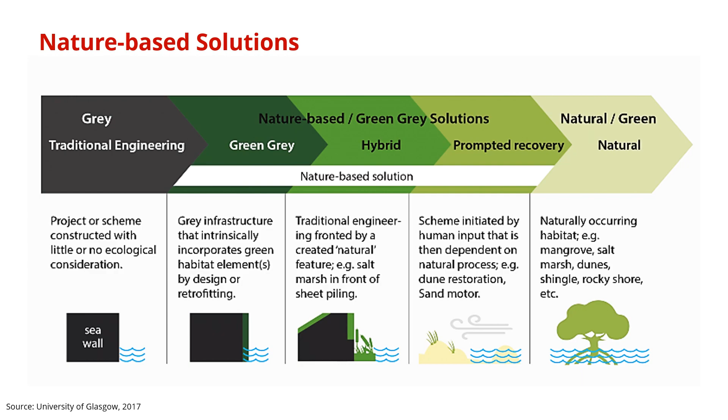NbS emphasizes integrating natural elements into urban design for environmental benefits, such as stormwater management and enhancement of urban biodiversity. These approaches are increasingly seen as cost-effective and sustainable options, offering co-benefits like improving human health, enhancing biodiversity, and supporting sustainable livelihoods. They are crucial for achieving global targets in biodiversity conservation, climate change mitigation and adaptation, and sustainable development.

As one of the important approaches of NbS, let's look at the green infrastructure in more detail. The concept of green infrastructure refers to a range of measures that include plant or soil systems, permeable surfaces, stormwater harvest, and landscaping. These are designed to store, infiltrate, or evapotranspirate stormwater, reducing flows to sewer systems or surface waters.

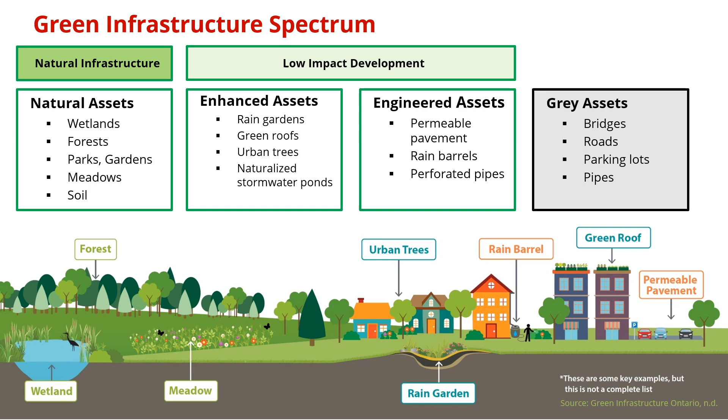Green infrastructure differs from traditional gray infrastructure by focusing on natural processes for stormwater management, offering environmental, social, and economic benefits. The spectrum of GI can range from natural ecosystems like forests and wetlands to engineered solutions like porous pavements, with features like bioswales and green roofs in between. This eco-techno spectrum helps to conceptualize the variety of GI features in urban settings and is crucial for evaluating their effectiveness in providing infrastructural services.

Within the green infrastructure spectrum, there are different approaches. NbS is an umbrella concept of ecosystem-based approaches to address societal challenges. These approaches include: 1. Low-impact development relevant for urban planning. 2. Restorative approaches in integrated coastal zone management. 3. Sustainable land management approaches. 4. Integrated water resource management. 5. Integrated fire management. This session will focus on low-impact development, integrated coastal zone management, and sustainable land management.

Most importantly, when we implement NbS, we have to keep in mind the 8 principles as advocated by IUCN. First, NbS embraces nature conservation norms and principles. However, they note that while NbS embraces nature conservation, not all conservation actions necessarily qualify as an NbS.

NbS can be implemented alone or in an integrated manner with other solutions to societal challenges, for example, technological and engineering solutions. NbS is determined by site-specific natural and cultural contexts that include traditional, local, and scientific knowledge.

NbS produces societal benefits in a fair and equitable way in a manner that promotes transparency and broad participation. NbS maintain biological and cultural diversity and the ability of ecosystems to evolve over time.

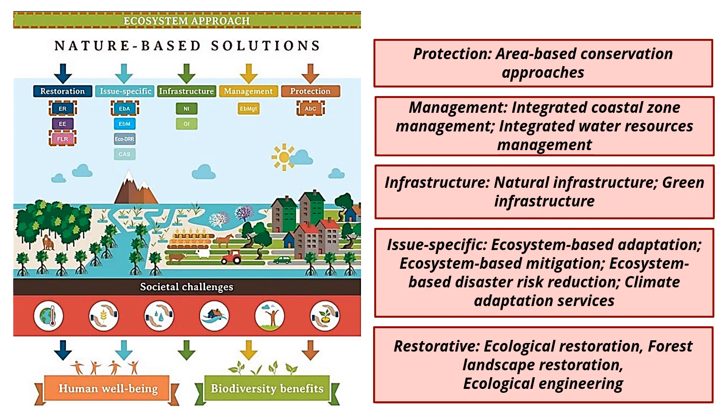It is important to remember the following. NbS enhances our array of ecological strategies. Even deserts, as ecosystems, play a role in this diversity. Economic activities need not cease entirely but rather progressively shift towards sustainability.

As innovation drives new solutions, many will emerge from a hybrid zone combining nature and technology. At the moment, low-impact development represents readily achievable options. These solutions are tailored to specific hazards and locales, contributing to a sustainable transition. NbS are dynamic, constantly evolving to be specific to particular hazards and locales within the broad and active realm of sustainable practices.

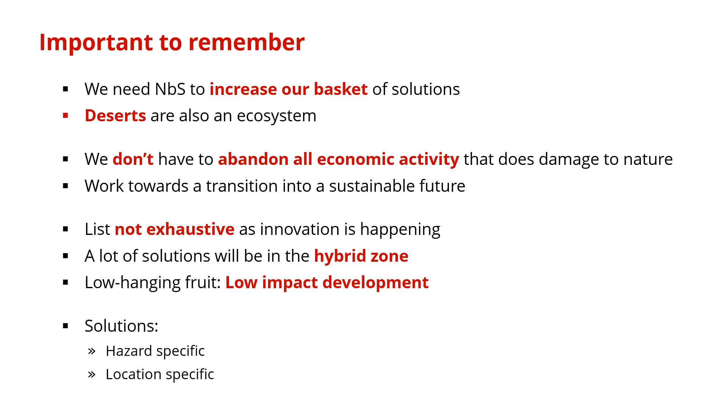In the urban context, green infrastructure is a strategic approach to developing interconnected and multifunctional networks of blue and green spaces that provide a wide range of environmental, social, and economic benefits and simultaneously enhance the climate resilience of cities.

Urban green infrastructure includes different types of blue-green spaces such as forests, wetlands, agricultural land, public parks, private gardens, single green elements like street trees and green roofs, or ponds and streams. These play a crucial role in enhancing climate adaptation and mitigation capacities and reducing negative impacts of climate change hazards such as heat waves, flooding, and drought in cities.

In a city setting, NbS specifically refers to different typologies of green infrastructure that use nature's own local resources - vegetation, water, and soil - in a smart and efficient way to tackle different environmental, societal, and climate challenges instead of implementing conventional gray infrastructure or technological-based solutions.

The spatial scale of NbS in cities can vary from large forested areas to small-scale stormwater systems. In addition, the role of human control or technological solutions in NbS can also vary greatly, from self-regulated natural ecosystems, such as flood control provided by urban wetlands requiring no or limited human intervention, to hybrid gray-green solutions, such as systems for the management of stormwater and urban runoff, for which technology and human intervention play a significant role.

Now, let's look at some commonly used examples of green infrastructure in a city.

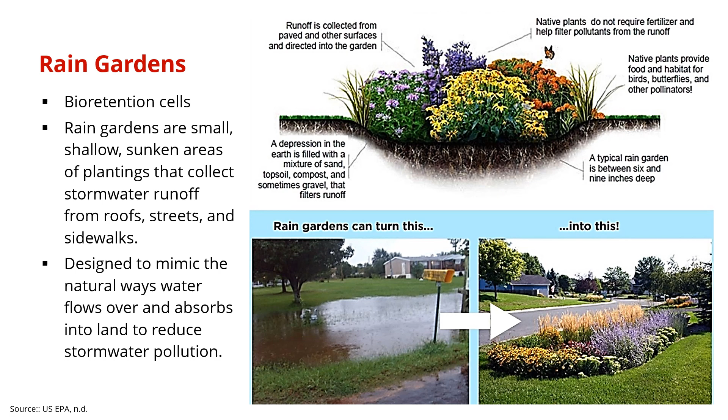They help keep polluted water out of our sewers that would need to be treated at a wastewater plant or would overflow into a water body. Stormwater becomes polluted when it flows over pavement and comes into contact with automotive fluids, sediment, trash, and pet waste. Pollutants can be absorbed by the deep plant roots instead of contaminating our rivers, lakes, and streams.

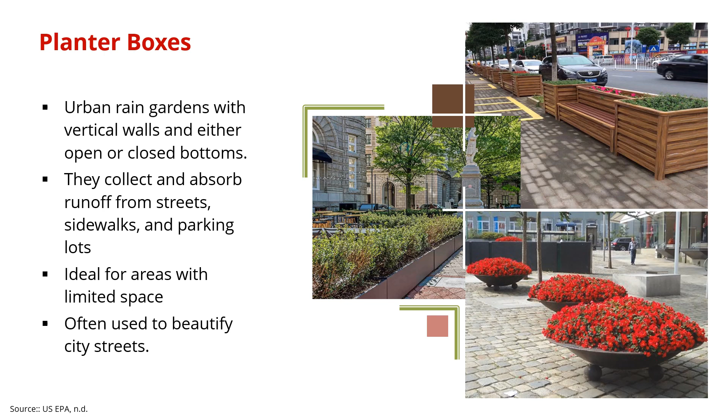The next example is planter boxes. Planter boxes are urban rain gardens with vertical walls and either open or closed bottoms. Usually found in downtown areas, they collect and absorb runoff from streets, sidewalks, and parking lots. Ideal for areas with limited space, planter boxes can be a useful way to beautify city streets.

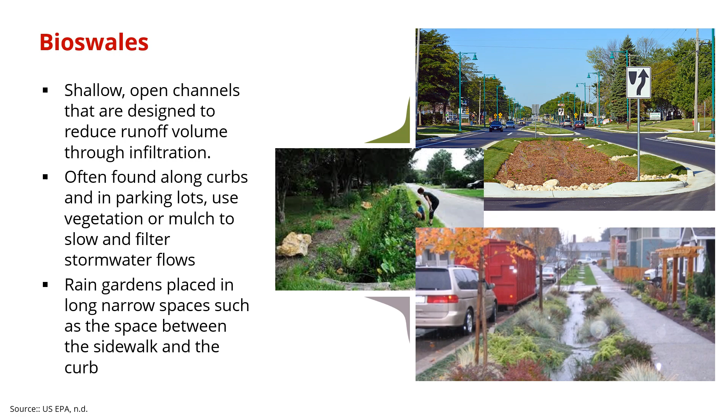Another good example is bioswales. Bioswales, often found along curbs and in parking lots, use vegetation or mulch to slow and filter stormwater flows. Bioswale essentially allows water to be taken to a filtration site after a rainfall event.

The problem with the traditional gutter system is that water doesn't get any treatment before it goes to the river, stream, water body, or the ground. Aside from living organisms, there are impurities like oil, grease, tar, carbon, heavy metals, and gasoline. An open swale is better than a concrete pipe but is not very effective in filtration.

So, a bioswale is needed. A typical bioswale would have an engineered soil mixture that filters water before it goes to the ground. Along with the soil mixture, native plants and shrubs, which are equally important for filtration, are used. A vegetated bioswale is a narrow version of a rain garden. The main difference is that the bioswale moves water somewhere else in the garden, allowing some of it to infiltrate, while a rain garden is specifically meant to increase infiltration.

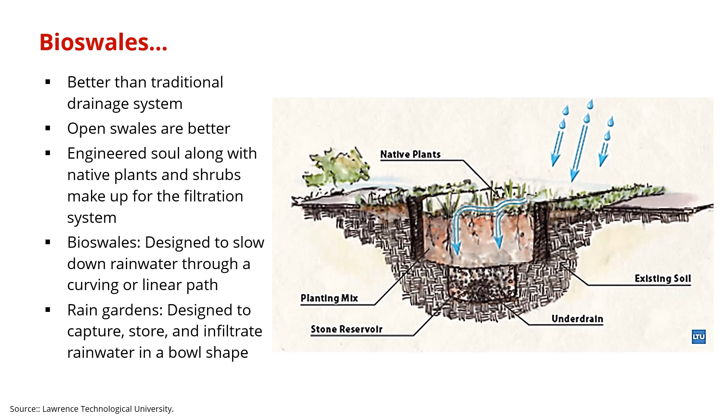We also have seen urban canopy being used by numerous cities. Trees absorb stormwater in their leaves and branches. Many cities have set tree canopy goals to restore the benefits of trees lost when the areas were developed. Homeowners, businesses, and community groups can participate in planting and maintaining trees throughout the urban environment.

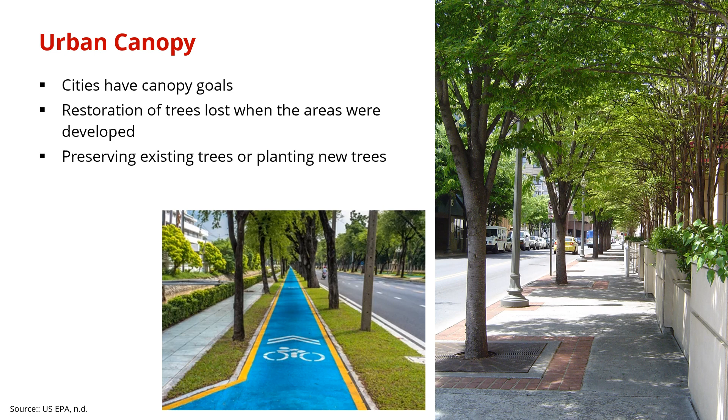The use of strategic green spaces can not only absorb stormwater runoff but also reduce the urban heat island effect. Green streets and alleys are created by integrating green infrastructure elements into their design to store and filter stormwater. Permeable pavement, bioswales, planter boxes, and trees are among the elements that can be woven into street or alley design. In addition, green spaces can lower drought impacts and remove carbon.

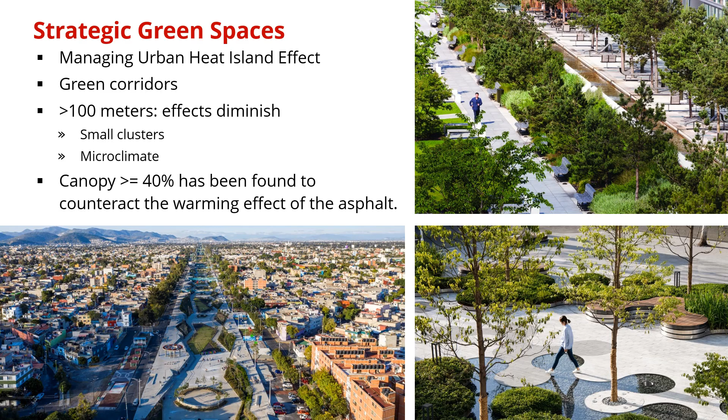The use of permeable pavements is another common example by cities. Permeable pavements infiltrate, treat, and store rainwater where it falls. They can be made of pervious concrete, porous asphalt, or permeable interlocking pavers. This practice could be particularly cost-effective where land values are high, and flooding or icing is problematic.

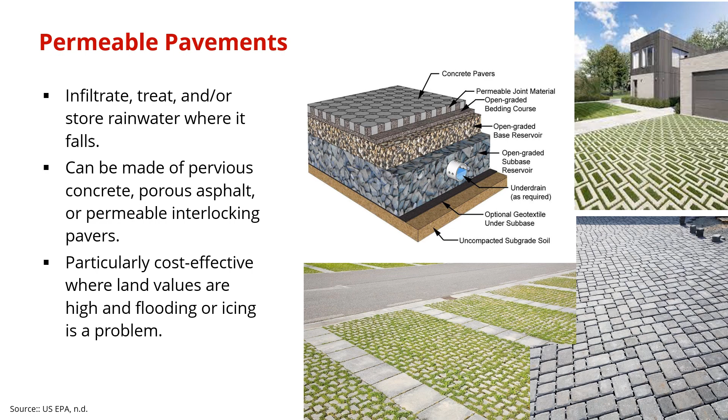Another example is the use of green roofs. Green roofs are covered with growing media and vegetation that enable rainfall infiltration and evapotranspiration of stored water. They are particularly cost-effective in dense urban areas where land values are high and in large industrial or office buildings where stormwater management costs are likely high.

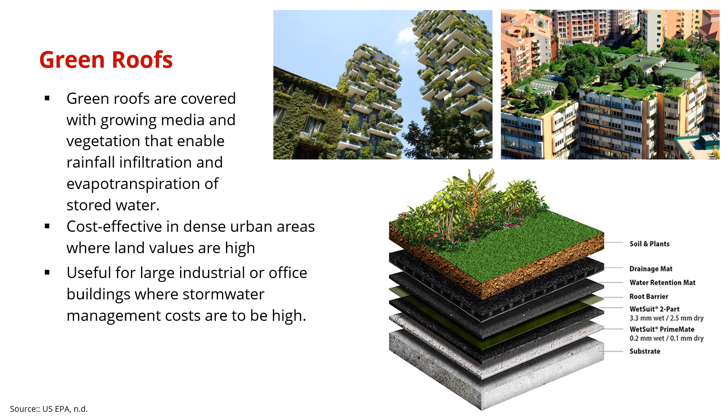Another good practice is low-impact development, a land planning and engineering design approach aimed at managing stormwater runoff as close to its source as possible. It prioritizes the preservation and use of natural features to protect water quality and associated aquatic habitat. There are many examples of low-impact development.

Capture and reuse of rainwater, downspout disconnection so that the rain is drained into rain barrels or permeable areas instead of storm sewers. Soil restoration is a technique used to enhance and restore soils by physical treatment and/or mixture with additives, such as compost, in areas where soil has been compacted. Soil media restoration increases the soil's water retention capacity, reduces erosion, improves soil structure, immobilizes and degrades pollutants, supplies nutrients to plants, and provides organic matter.

A vegetated filter strip is a permanent, maintained strip of vegetation designed to slow runoff velocities and filter out sediment and other pollutants from urban stormwater. These are just some examples of low-impact development combining engineered and gray assets.

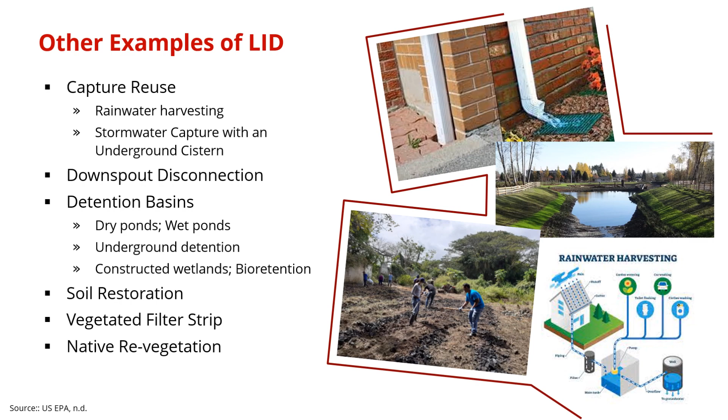Now, let's look at the concept of sponge cities. Since it was conceived in 2013 by Professor Kongjian Yu, the sponge city concept has presented an opportunity for Chinese cities to implement new integrated urban water management strategies. A sponge city is an innovative urban planning concept designed to tackle the challenges of increased rainfall and urban flooding due to climate change. The key idea behind a sponge city is to create an urban environment that can absorb, store, and purify rainwater effectively, much like a sponge does with water.

This approach involves the integration of green infrastructure into city planning. This includes features such as parks, rain gardens, green roofs and walls, permeable pavements, and other elements that increase the permeability of urban surfaces. These features allow rainwater to be absorbed into the ground, reducing runoff and the risk of flooding. Additionally, these green spaces can help purify the water and contribute to improving the urban microclimate, thereby reducing the urban heat island effect. The sponge city concept is particularly relevant in the context of climate change, as it provides a way to mitigate the impacts of both flooding and droughts.

The idea first gained significant attention in China, where it was adopted as a national strategy in response to severe urban flooding issues. Cities like Wuhan, Chongqing, and Xiamen have been pioneering this approach, setting ambitious targets for rainwater management and recycling. Cities around the world are increasingly adopting similar approaches under different names, such as water-sensitive urban design in Australia and the Middle East, sustainable urban drainage systems in the UK, and natural drainage systems in Seattle, USA. These initiatives address water management concerns, enhance urban biodiversity, provide recreational spaces, and improve overall urban livability.

The implementation of sponge city principles requires a multidisciplinary approach and long-term planning involving detailed analysis of the urban watershed, soil studies, rainfall patterns, and other environmental factors. Despite the challenges, sponge cities represent a promising and cost-effective way to adapt urban environments to the changing climate while enhancing their inhabitants' quality of life.

It will mean using many of these options to plan and increase the sponginess. Based on China's Sponge City Initiative, sponge cities in China must ensure that 20% of their urban land includes sponge features by 2020 and 30% by 2030, with a target of being able to retain 70% and 80% of stormwater, respectively. It has been estimated that a key reason the southern China floods in 2020 were not as damaging as in 1998 was the investments made in nature-based solutions like sponge cities, together with tree planting and floodplain restoration.